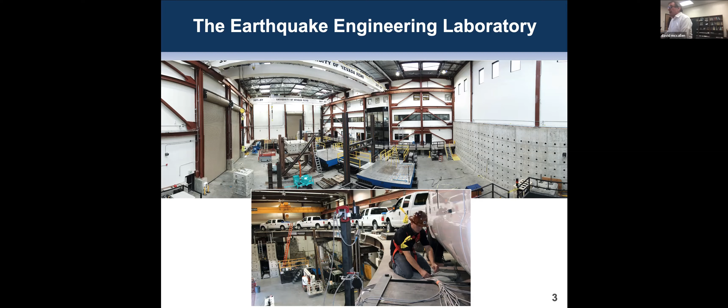It's a little loud, but I'm going to show you an example of what that shake table test looked like on the next video. So bear with me as it gets a little noisy.

Whoa. Oh my God. So this is just one example of a test.

Now, I don't know about Dr. Buckle, but that audience looks a little close to me to that test. After I saw this video, I coached him about that the other day, and he had supreme confidence based on their first series of tests that everything was going to be okay. But that's an example of the type of complex tests that we do.

We have a number of key stakeholders that look to us to help solve their challenging problems. I'll point to two. The one on the left is some bridge column work we did for the California Department of Transportation, where they wanted to understand the ultimate capacity of some of their bridge columns.

So we could build those columns in the laboratory, connect the hydraulic ram you see in the upper right-hand corner, and push and pull on that column to determine the ductility of that column - not just the strength, but how well it can absorb energy and not break in brittle fashion. That's one example of our stakeholders.

It's NDOT, a whole plethora of various state agencies. On the right, and something that's become even more important for us, are federal sponsors. The Department of Energy has been a very large sponsor of ours over the last 4 or 5 years, and this was a test of a very large column, a type that resides in a very critical, one-of-a-kind facility at Los Alamos National Laboratory.

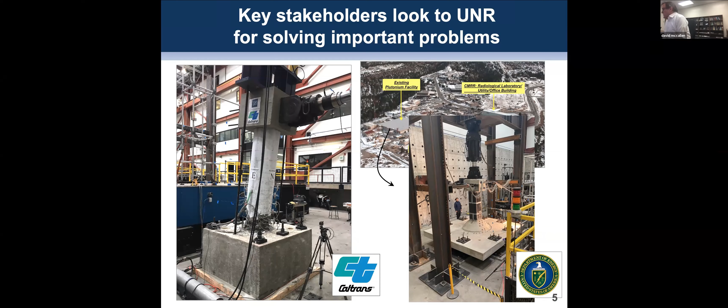We built and replicated their columns in the laboratory and pushed and pulled on those columns to determine the capacity of those columns as well. The point is, we do a lot of work for a lot of sponsors, and we're typically solving critical problems and answering unanswered questions, determining the strength and capacity of those structures.

That's been the rich history of what we've done here in the laboratory. What I really want to focus on today, though, is our new strategic directions and opportunities, and share those with you—things we're really excited about. What I'm showing you here, in these boxes, is our traditional area of large-scale earthquake experimental testing, and that's really been our forte for many years.

We are adding to that with a very new facility being supported by the Department of Energy. A significant portion of my talk today will focus on a new experimental facility tailored to understanding something called soil structure interaction, and I'll explain what that is in the next couple of slides.

In addition to that area, we're looking towards new things we can be at the cutting edge of. One is advanced computer simulation, shown in the box in the lower left-hand corner. As many of you probably know, high performance computing has been on a tear the last two decades, and that continues—people are building ever faster and bigger computers, which allows us to model and replicate earthquake behavior in ever increasing detail with ever increasing fidelity. So it's really important that we be, to some degree, on the cutting edge of advanced simulation as well.

Finally, on the lower right-hand corner, there's an emerging area called structural health monitoring, or intelligent infrastructure systems. Historically, if people wanted to understand the condition of their facility or structure, they'd send out technicians to walk it down, take pictures and notes, and visually inspect things.

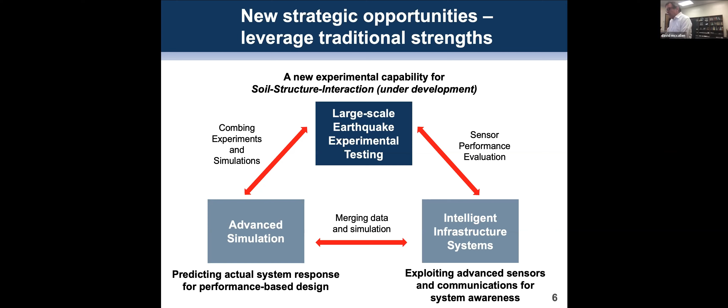What I've shown with the red arrows is that if we play our cards right and plan this strategically, all of those things on this graph are interconnected. They're all related—we can use simulation to predict our experiments and design our experiments, and we can use our experiments to confirm the accuracy of our simulation models, for example. They're all at some level interconnected, and we're moving forward in all three of these areas.

I'll avoid technical jargon as much as I can, but there's one term I really need to dig into, frame, and describe to you just a bit in order to motivate what we're doing in this new large-scale facility—the phenomenon that engineers call soil structure interaction.

Imagine if you have a very large or massive structure, or an embedded structure, and earthquake waves impinge on this facility and the ground shakes. These structures that we're concerned with can have a significant interaction with the supporting soil, as shown in this cartoon. The structure rocks back and forth, and it can deform the soil and cause interaction with that soil that is very complicated to characterize, model, and understand, frankly.

Some of our most important structures have to account for this type of behavior. It's very difficult to get a comprehensive look at this type of behavior in the field because it's hard to instrument the subsurface and understand how the ground's deforming. We can generally instrument a superstructure, but looking at the full coupled system is really problematic in the field. So we've got to think of a better way.

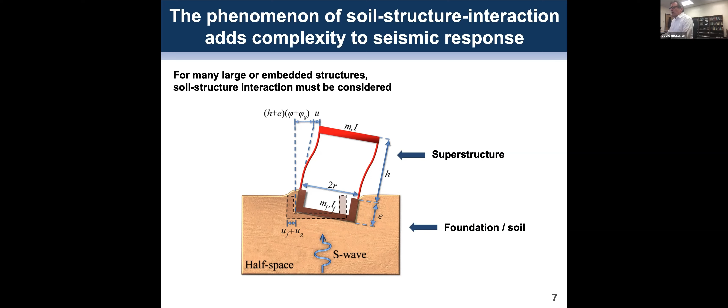So what we are pursuing, in concert with the US Department of Energy, is to be able to replicate how soil behaves in the field in a laboratory. The way we're doing that—if you think about this plug of soil in the field when an earthquake hits and how that responds—we want to design a system in the laboratory that precisely replicates that type of behavior.

This is a lot harder than just getting a big giant soil bucket, filling it with soil, and shaking it. We have to have a very specially designed soil box so that the deformations and the way this big plug of soil behaves in the laboratory is identical, or as close as we can make it, to how it behaves out in the field. Turns out that because of the characteristics of soil, we have to have a very large soil mass to do that appropriately, because the constitutive behavior of soil depends on the overburden that confines it. So we have to have a large bucket of soil that we then have to shake.

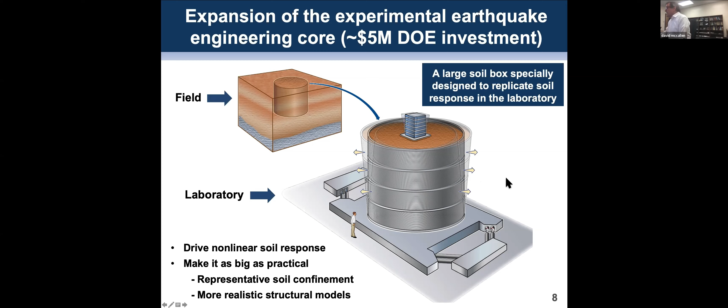So the concept goes as follows: this is a very, very large structure we call a laminar soil box that has behavior that can replicate the behavior of soil in the field. It's very specially designed, and I'll go into a little more detail on this.

We put that big laminar soil box on a big steel platen that's floated on hydraulic bearings, allowing the whole assembly to move back and forth very easily. Then we have giant hydraulic rams, what we call hydraulic actuators, that react off massive concrete blocks and can shake the table and thereby shake the whole soil box. We can put a structure on top of the soil and replicate these earthquake motions, and put a bunch of sensors above and below the structure to really understand the complex interaction between the soil and the structure.

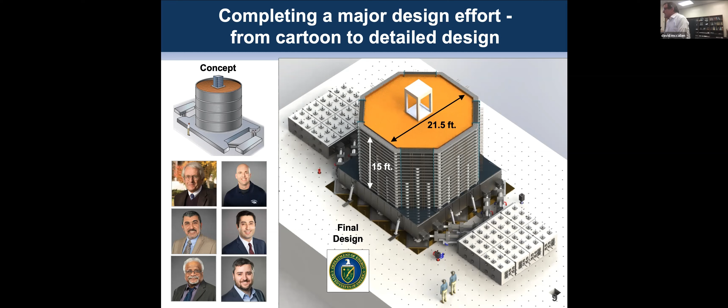This will be the largest such facility in the United States by a large margin. There's a facility about this size in Japan that does similar work, so this is going to really be a unique capability within the United States.

This is just another view of that in profile that gives you a little better look. You can see the reaction blocks, the actuators, and the hydraulic bearings I'll show you pictures of in a moment that this table basically floats on. We have 408 of those elastomeric bearings, or little rubber washers, within this wall, and they're graded in a very special way so they're not uniformly distributed, so we get the right behavior.

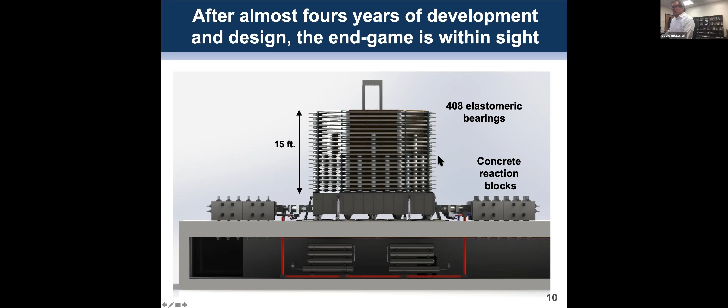So that's another picture of our assembly. We couldn't do this without our commercial partners from Reno. Reno Iron Works has been a longtime partner for us on many of our fabrication activities, and they played a central role in developing this soil box.

What I'm showing you here is up at the Reno Iron Works facility, where they're putting together that big platen or table that this rides on. It's a very carefully designed big hollow box with all of these webs you can see here. You couldn't make this solid, it would be too heavy, so we have to have a honeycomb structure, a very well-designed honeycomb structure. This is just one element being welded up at Reno Iron Works.

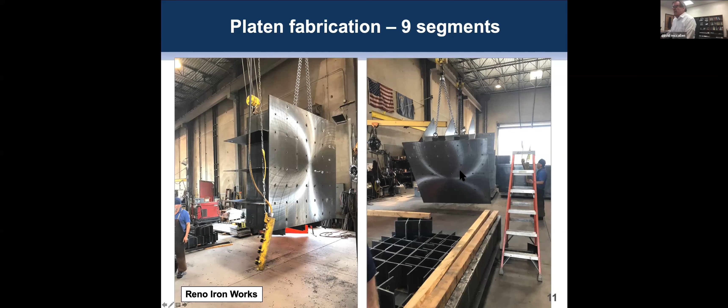Then of course they delivered all of the assembly. Now we're looking at, in this cartoon on the right, the steel platen that the soil box rides on, and you can see the final fit-up of this with the Reno Iron Works workers in our laboratory. This whole assembly weighs about 100,000 pounds, and it came in 9 segments that they had to fit and finish very nicely. I can tell you this came out with a perfect and exceptionally flat fit-up, so they really delivered for us.

It's not easy in welded structures because of all the heat and welding to prevent deformation and warping. You have to be very, very careful. This just came out with a marvelously flat surface, so kudos to Reno Iron Works - they did a tremendous job, and our project couldn't have gone forward without that contribution.

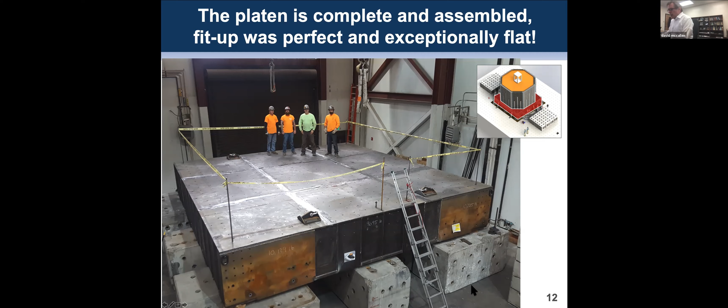There's a company called Dynamic Isolation Systems out in the business park east of Reno. They are world experts in generating and developing bearings for seismic isolation, and they were instrumental in making the bearings. This is a close-up picture of some of the bearings in the steel tubes in our box wall.

They had to make bearings at a rate they hadn't done before. We needed 408 of these. The secret sauce in making bearings is the constituency of the rubber, and it's even worse than a family recipe that nobody will tell you about. They have secret recipes for their bearing rubber.

To accommodate this large throughput for the bearings, they had to cure these bearings in mass. So they came up with some jigs so they could pour the rubber and cure these bearings in series, resulting in getting 408 of those for us in a reasonable time frame.

We had to qualify those bearings, so we would take out a sample, bring them down to our laboratory, and push and pull on those to validate them. This was a tremendous effort to develop those bearings.

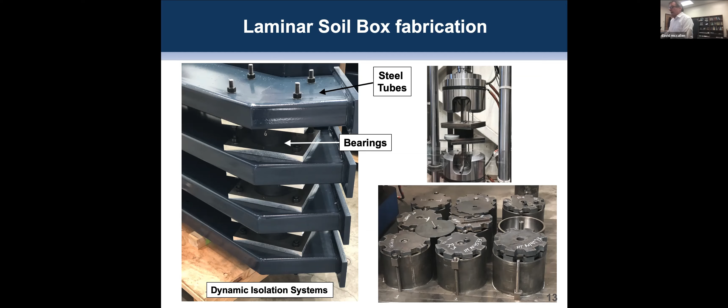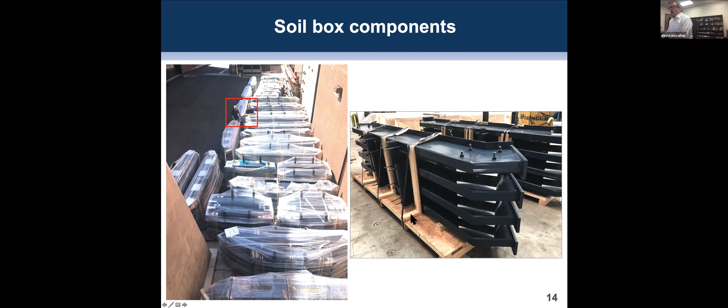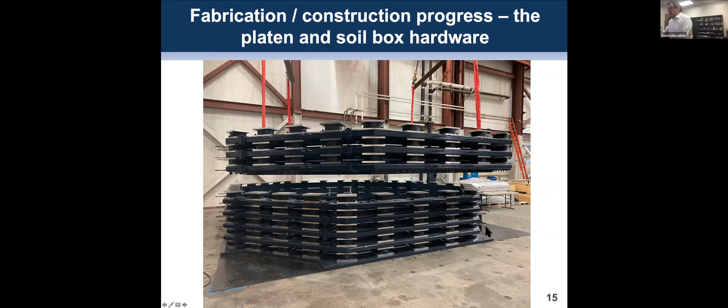Then we had to pull and put the box together. This is the box going together in segments in our laboratory. You're seeing a box segment dangled down from our overhead crane. We build these in about 5-foot chunks, bring them over, and connect them. This is an example—this is the completed box. This picture is deceiving because it's a lot bigger than this when you stand next to it.

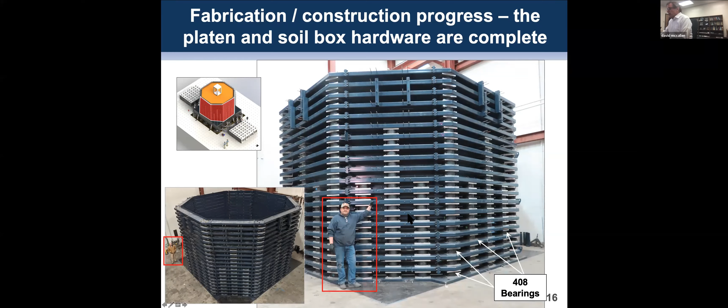The box has to resist more load near the base, so there are more bearings there, and we want it to have a pure shear deformation mode, so we reduce the number of bearings as we go up in the box. This is the actual item you see here, and this is where the soil will go. 20 small dump trucks of soil will go inside this once we fill it up, and then we'll put the structure on top on the outside.

But that's not all—we have to look at our other components. What you see here are those giant reaction blocks I was talking about that we have to react off of with our hydraulic actuators. We have a very deep 3-foot slab floor here, but these reaction blocks have to resist when these hydraulic actuators start pushing on the soil box. They have to react off of something—so they react off of these reaction blocks.

So we brought in 16 cast massive concrete reaction blocks. We drilled down through the floor and put steel rods down through, bolting all these to the floor. You see the scale of these—the reaction blocks at one end are shown here, and the reaction blocks at the far end are shown down here. Then the actuator plates are connected through these aluminum plates to that box, and they drive the main soil box.

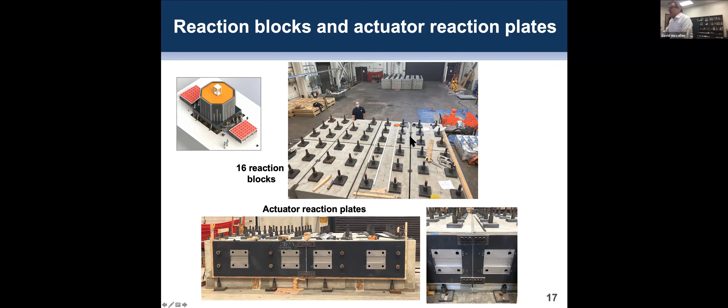This is a big, massive box that we're going to shake, full of dirt, but there are still extremely precise alignment and precision requirements for this box. I mentioned the box is floated on hydraulic actuators. If the pads that the actuators operate on are not level or are tilted, you can't float that whole giant dynamic system efficiently and get it soft and weak enough so the actuators can drive that box. So that requires very precise alignment of the whole system that supports the box.

So what you see here are our lab staff and technicians putting in and precisely leveling all the reaction plates that those hydraulic actuators are going to slide on.

So in the center, we have a rotating laser and a sensor out here, and that laser rotates so we can precisely adjust and determine the leveling of all of these pads. Even though this is a very massive rigid system that we're going to be shaking very hard under earthquake motions, it has to be very precisely aligned and set up so that it floats just right. It's somewhat temperamental in that standpoint. There's not a lot of people in the world that can do this.

We're lucky to have a very, very experienced team in our laboratory that have built these shake tables before, and I'm telling you, these folks really know how to do this. So it's a tremendous advantage to us in being able to build these types of unique facilities.

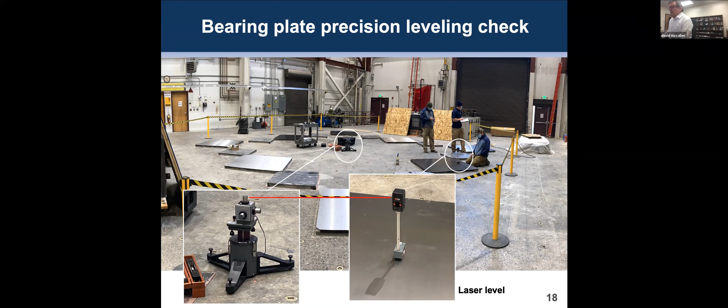So we're in the home stretch for this segment of the presentation. This is Dr. Patrick Laplace, standing in the middle of where the shake table is going to reside. You can see now the reaction blocks, and each 250,000 pound actuator. These are slanted at an angle because we're going to be able to shake this with biaxial, or earthquake motions in 2 directions simultaneously. So you see 8 of these massive actuators. These had a lead time of over a year, so we had to outline our procurements well ahead.

This is not hardware that you just bop down and get in rapid, just-in-time delivery. We had to supply chain all of this hardware, and these were developed by MTS, a major vendor. So all of this stuff had to be set up schedule-wise in a very carefully aligned procurement process because of the lead time. These are semi-custom items.

Now you can really see here the reflection and how smooth these plates are, where the hydraulic actuators ride. Each one of these hydraulic bearings has a thin sheet of oil and will slide back and forth on this very smooth plate to get as close to frictionless as we possibly can. So all of our energy goes into shaking the mass of the box, not overcoming friction at the contact points. These have to be precision aligned and as close to frictionless as we can possibly get, so that whole giant platform box is floating vertically, and then we can easily shake it with the actuators and generate the types of strong motions that we would like to.

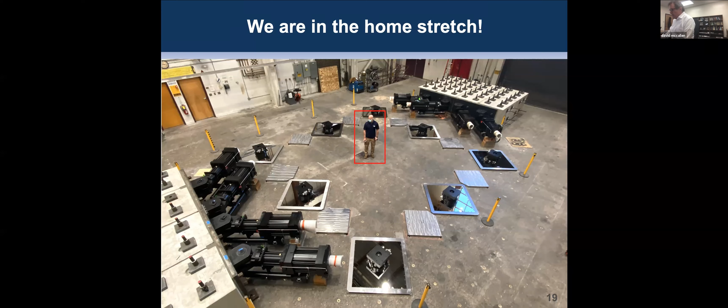However, I want to mention a couple more things. I mentioned the increases in speed and high performance computing. I'm showing you a simulation on a massively parallel supercomputer at Oak Ridge National Laboratory that was done by our colleagues and some of our folks here at UNR, at Lawrence Berkeley National Laboratory. This is simulating at regional scale a giant computational model of a magnitude 7 Hayward Fault earthquake occurring in the San Francisco Bay Area.

The computational model encapsulates the whole Bay Area, as you see here. That model has 200 billion grid points, and we're using what's called a finite difference grid to model the wave propagation in this area. This is simply emblematic of how far computations has come and how we are harnessing these large-scale simulations to really better understand earthquake phenomenology, both from the standpoint of the earthquake ground motions and how those ground motions vary in a complex fashion across the region.

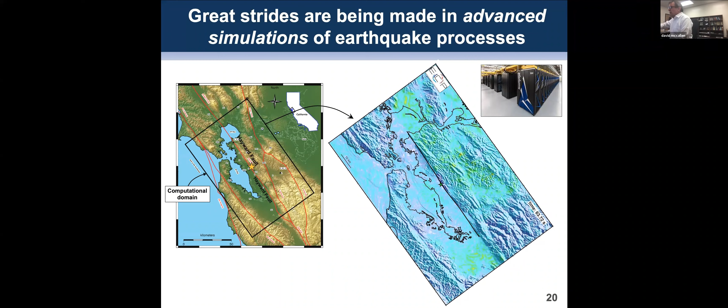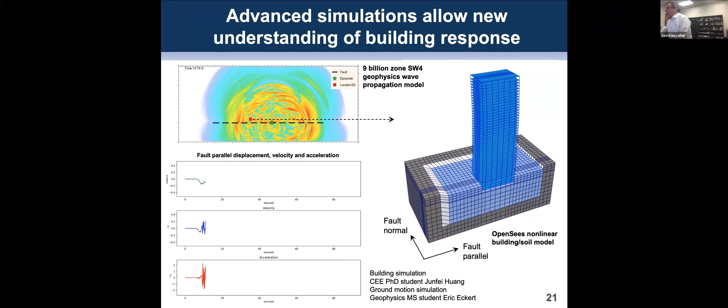Also, in what we're doing here at UNR, which is quite important for our students, is understanding how these earthquake waves interact with a building or a structure. On the left, you see a simulation of an earthquake, with the earthquake waves propagating away. We are coupling our soil and building model on the right to that geophysics model on the left.

So that we can really replicate in simulation space how those earthquake waves interact with that structure. This particular simulation was done by a PhD student of mine, Junfei Huang here at UNR, and a geophysics student, Eric Eckert, a master's student in geophysics. This goes to my point of enhancing our simulation capability and having a cutting edge simulation capability.

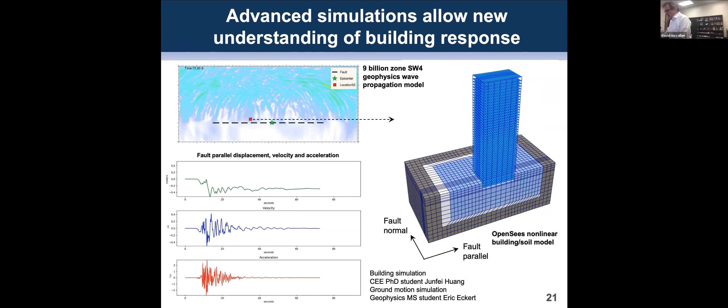That will very nicely complement and augment our ability to do experimental testing. When you do these types of things on a computer, you learn a lot. You can play the what-if game. You can look at different earthquakes, different rupture scenarios, different buildings, different designs of buildings in a very efficient way, and then link that to the experimentation in the laboratory to validate the effectiveness of the structural components and how things behave. That's a tremendous, important new capability for us.

I'm going to end with the last area: intelligent infrastructure. This is really the area I mentioned early on about an opportunity to exploit this tremendous advancement in communication technology and the Internet of Things that is coming. We have been working on developing some very specialized sensors that will allow us to have a building that is, in essence, a self-monitoring building.

An earthquake occurs, and we are going to have sensors in that building, and I'll talk about our first deployment in a moment, that will communicate with wireless RF communication so we don't have to drag cables. The sensor will measure what's called interstory drift in a building, and I'll talk about that in a moment. It will communicate that to a central node.

That'll go up to a gateway, and that gateway will either communicate out through the internet to distribute that data very rapidly to a response center, send an email notification, or even send data to a phone app that you can get remotely. That will be one avenue. Or alternatively, if the earthquake is so bad that the internet is down, we're going to have an option to blip data up to a satellite through an Iridium satellite connection, so we can always reliably get that data out.

This goes back to the notion of being able to respond rapidly right after an earthquake, particularly for facilities that have to have continuity of operations, whether it's a hospital, a fire facility, a business operations center, or a facility that contains hazardous material that you want to understand the integrity of. There are a plethora of applications where stakeholders would like to know about the health of that building right after the earthquake.

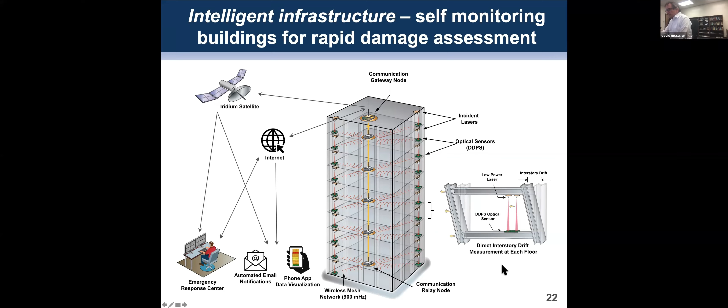That's a task that, in terms of a visual walkdown, can take weeks or months, or can even be impossible in some sense when a lot of the elements are hidden behind architectural features and drywall. So this is a real technical challenge, but it's one that we think is very, very important.

Our work here at UNR has been developing an optical sensor for measuring what's called interstory drift, or deformation of a building. Historically, we've used accelerometers that some of you may be familiar with to measure the vibration of our building. And I would assert measuring the vibration with a vibration sensor is not optimal, but it's the technology that's been available for the last five to six decades.

What we are doing is taking a very low power laser. If you think about a building deforming during an earthquake, and you blow that up—this is one floor—as that building shakes back and forth, that floor deforms. The columns twist and the beams twist, and you get a distortion or deformation of that floor.

That distortion or deformation is a direct measure of the stress that building has been subjected to, so you would like to measure that. Turns out that's a very hard thing to measure accurately with accelerometers. So we had the idea of propagating a laser across that floor and having a very specially designed sensor that is sensitive to where the laser is on that sensor. It can detect where that laser is hitting.

If you imagine this building moves back and forth, that laser that's mounted on the ceiling is going to shift relative to the sensor mounted on the floor. That gives us a measurement principle for measuring directly this interstory drift.

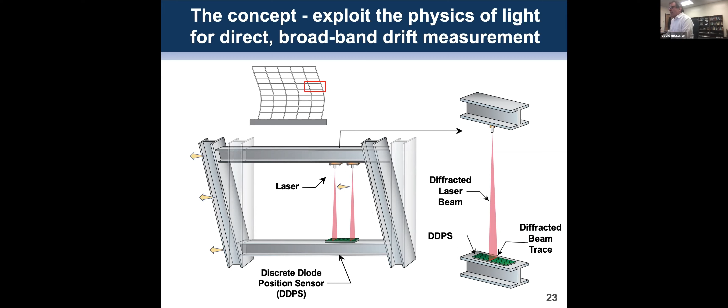So we take a laser, we diffract it and bring it down and impinge it on what we call a discrete diode position sensor. This is just a grillage of a large number of very small light-sensitive diodes, so we can measure exactly where that laser is hitting. This gives us a new technology for measuring directly interstory drift.

We have gone through a spiral evolutionary design. This was the first generation 1 sensor that we cobbled together from various components. You can see the diode array here of the 3-diode set. We moved on eventually to generation 2 and then generation 3, which we built here at UNR, where we began to engineer this. Once we demonstrated that this would perform in the laboratory through extensive testing, we began to actually engineer a system that could be deployed in the field and was deployment ready.

You'll see here we have a communication node. We've skinnied this down to have a very slim and compact set of diodes, and a package here that all of this goes inside with recessed holes so we can use a very low power laser for that. That was generation 3 that we've deployed.

Currently in the laboratory, we're working on generation 4, which will be the end game or final generation of this. You can see this has a large number of diodes in there as well that the light comes down and shines on. But this is in 2 dimensions and it's biaxial. So when a building shakes, it shakes in 2 directions. This new biaxial sensor that we're going through proof testing on right now can actually measure the biaxial deformation of a building in 2 directions.

This is an intense effort. We're moving towards, frankly, commercialization of this technology and looking for partners for commercialization.

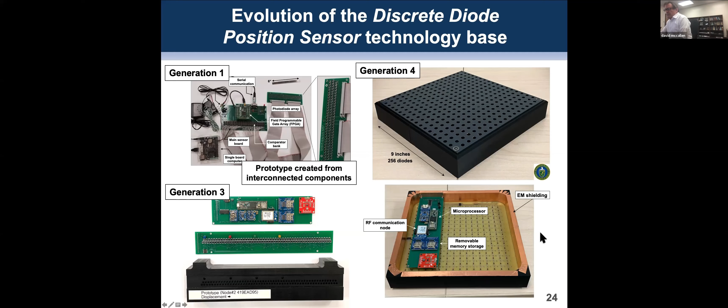I mentioned at the start that when we do things like simulation and develop sensors, that's very synergistic with our experimental capability, and that's the case here as well. So I'm going to show you two of our laboratory tests.

The one on the left is testing this on a steel frame structure that we're shaking under earthquake motion, and you'll see that vibration with these sensors on, so we can validate the performance of these sensors. We showed that they work quite well.

This on the right is the new biaxial sensor, and you can see the impinging laser light in a circular pattern now coming down and hitting that sensor. Let me see if I can start this over. The earthquake is going to hit. We're putting on earthquake motions that we got, guess where, from our simulation model.

You can see that floor jerk across on this 10-story building, and that is a realistic motion for a near fault earthquake. You can kind of imagine how you would feel that first pulse if you were standing on this floor in the building.

This laser, we're sampling all of these diodes 300 times a second. So we know precisely where this laser is hitting, so we can measure that relative deformation in that building as the building vibrates and this motion persists.

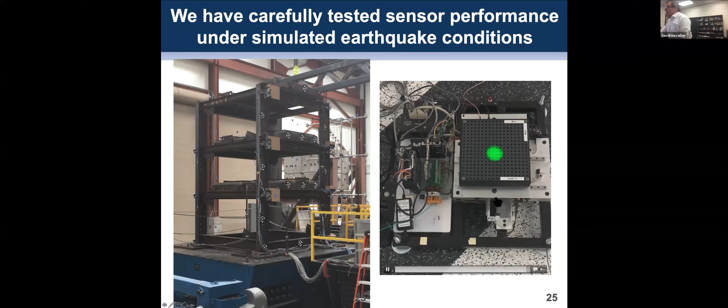We are really, really pleased because we just got our first set of data from this, and Dr. Floriana Patrone is leading this effort, one of our new young faculty members, and the data is really, really good. So we're really excited about this going forward.

We've deployed 4 of the Gen 3 sensors in the Bay Area. Those of you familiar with the Bay Area, this is looking down at UC Berkeley and looking towards San Francisco. This is called Wang Hall at Lawrence Berkeley National Laboratory. It houses their supercomputer center.

Wang Hall, unfortunately for them, resides right here, about 150 meters from the Hayward Fault, which is probably the most dangerous fault in the country. If you're familiar with UC Berkeley, the Hayward Fault goes right through Berkeley Memorial Stadium. So there's probably not a more important building that would benefit from having rapid real-time evaluations of earthquake response.

This is our crew from the earthquake lab, deploying 4 of these sensors on our first trial deployment in this building, in 4 stations. These have been operational and running reliably since September 2019.

The field deployment is important because once you validate the performance in the laboratory, you need to have these out in the field for an extended period to know how they're going to behave in a real world environment. Is dust buildup going to be a problem? Is laser diminishment going to be a problem? Turns out the answer is no. These have been exceptionally reliable and they're running today. We're waiting for our first big earthquake.

The Bay Area usually has about a magnitude 4 earthquake once a year. These sensors have been going on for a year and a half, and we haven't had a magnitude 4. So I was telling my colleagues we should sell this as an earthquake thwarting system as well, because we just have not been able to capture the first big earthquake. But it's going to happen, and relatively soon, so we can get data in the field.

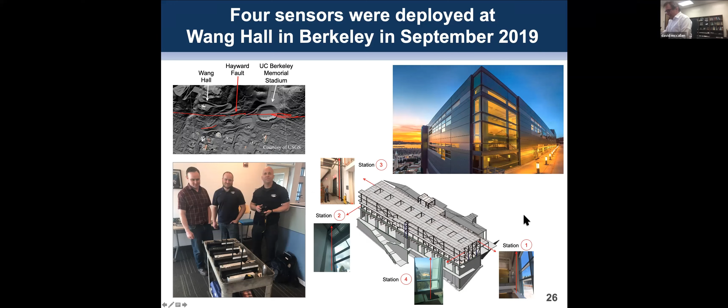We've also deployed our first outdoor deployment in Nevada, in collaboration with the Nevada Department of Transportation, on the Bowers Mansion overpass going down 395 towards Carson City. We put one sensor out there. This deployment is very important because it's the first time we've gone outdoors, where there's wind, dust, rain, and snow. So we are monitoring and evaluating this performance out in the open, in the air. This is a very important deployment for us, and so far, so good, even in the winter. So we're getting outdoor experience there.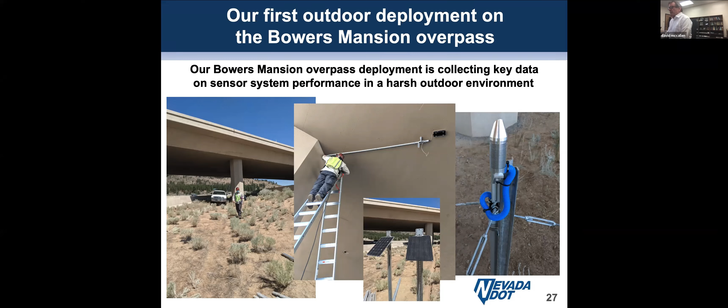So I'm going to end, and I'd be certainly happy to take questions.

These emerging capabilities, whether it's advanced simulation, intelligent infrastructure, or our new large-scale soil box, are really important to us moving forward and not being stationary. It's like any field — if you stand stationary, people and time pass you by. So we are working very hard and are very excited about these new capabilities, staying at the absolute cutting edge in our earthquake engineering laboratory and our faculty here at UNR. It's been a whirlwind overview, I know, but I'd like to end, and I'd be happy to entertain any questions you might have.

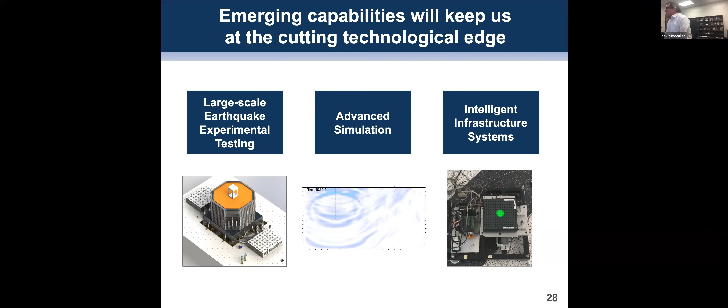I've got a question to kick it off. When do you think you'll resume in-person tours?

That'll be dictated by the university. I'm cautiously optimistic that in the coming year we'll be back on campus. Some of us have been on campus throughout — I teach my graduate course in person twice a week, with all the appropriate precautions. My graduate students want to be in the classroom; I polled them, and to the 90th percentile, they want to be in the classroom where we can mix it up. I think that's great. It sounds like the university, under state guidance, is moving back towards more on-campus activity in the fall. Time will tell, but hopefully we're going to get back to a more normal environment in the coming year, and we certainly hope we can have you all in to stand next to our shake table in our soil box when it's moving. So hopefully next year — that's my hope anyway.

I had two quick questions. One is, does the type of dirt in your box make a difference, or do you have to change the dirt depending upon where you're testing? Yeah, the type of dirt does make a difference. We have our box qualified for three different classes of soils — weak, medium, and stiff. So we have the ability to look at different types of soils in our box. One operational feature we'll have to work out as we start testing is how often, depending on the experiment, we need to change out the soil. As you can imagine, changing out the soil in that box is not a trivial task, so we'll see what the cadence of the experiments looks like. Our current thinking is we can probably do multiple experiments, depending on their character, before we have to remove and recondition the soil and put it back. Time will tell, but the answer to the first question is yes, we have a capability for looking at different soil types.